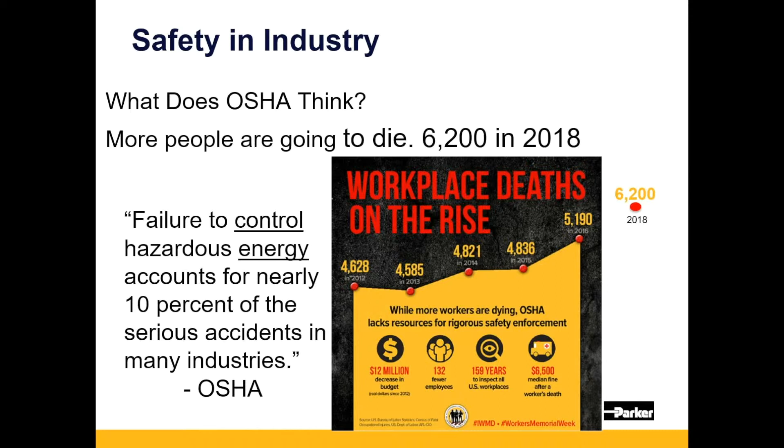OSHA cannot do this themselves. They have a huge budget decrease, and it would take them 159 years to inspect all of the plants in the U.S. So we need to work together to make industry better.

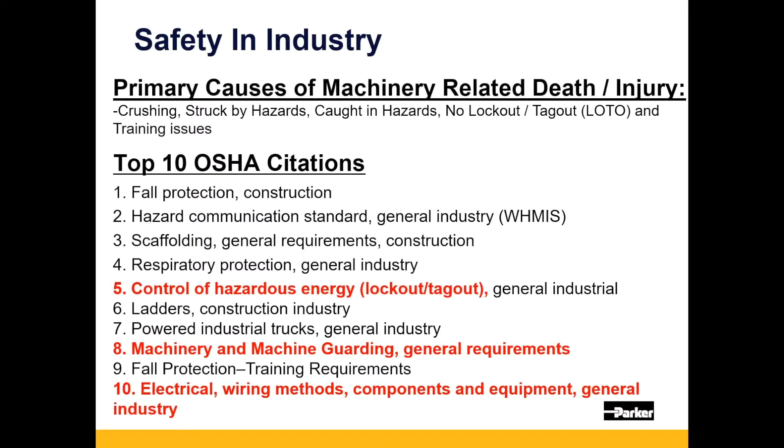What we do know is that OSHA writes a lot of citations because of machinery-related injury or death. And the ones I've highlighted in red are the ones where I feel we can really make a difference. Things like machine guarding, and really the isolation and energy in a machine has to be dealt with. To bring a machine to a safe state, we can't have trapped residual energy in a machine.

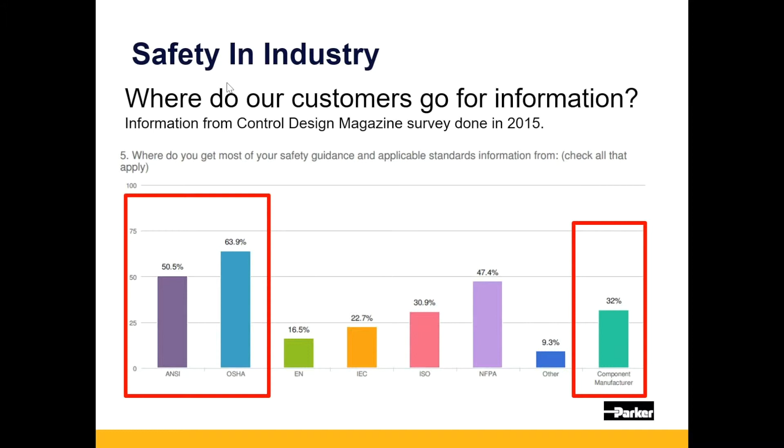So, where do our customers go for information? A U.S. magazine did a survey, this is back from 2015, and they realized that consumers and people are very confused about where to go. They're going to ANSI and OSHA and EN and IEC, and some of them even come to us, the component manufacturers, to Parker Hannifin for help, and companies like RG Group for support and assistance with systems.

So how does this all tie together? How does this work? ISO writes the standards. They were founded back in like 1947. They've been around for a long time. They're predominantly thought of as being European, but today ISO looks after 21,000 different standards, and they have 163 member countries worldwide. So ISO is probably the largest standards organization.

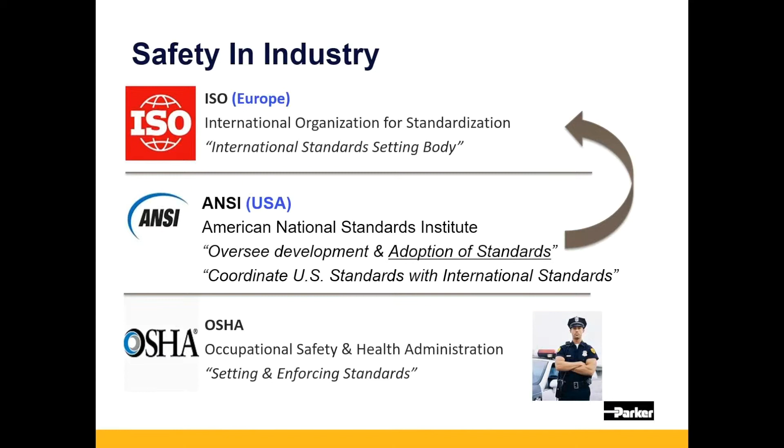Then we have ANSI, the American National Standards Institute, and ANSI oversees the development and adoption of standards, many of these standards coming from ISO, for the U.S. market. And then there's OSHA, the police who set and enforce the standards by adoption, applicable law. And for things they generally deem unsafe, they have something known as the General Duties Clause. So that's an interesting one, and we can talk about that a little bit more as we go.

So what does ISO say? The regulatory validation from ISO, and these regulations almost all in some way define isolation and energy dissipation as being necessary. So here is ISO 14118, section 3.3, and I won't read it all to you, but the gist of it is that it's an international standard about safety of machinery and prevention of unexpected startup, and it states in the gray text, dissipating any stored energy which may give rise to a hazard. It could be pressurized fluid, it could be pneumatics, energy stored in mechanical components.

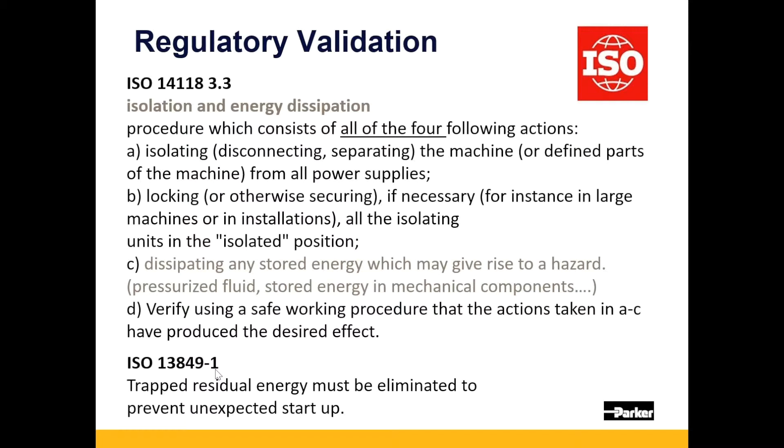And then ISO 13849-1 is another standard, and it very clearly states that trapped residual energy must be eliminated to prevent unexpected startup. And these two standards are predominantly in Europe. However, in the United States, ANSI has adopted these standards under what they call ISO 12100, and Section B11 states that it is applicable law and enforceable by OSHA that measures must be taken to prevent unexpected startup, including protective devices and energy dissipation.

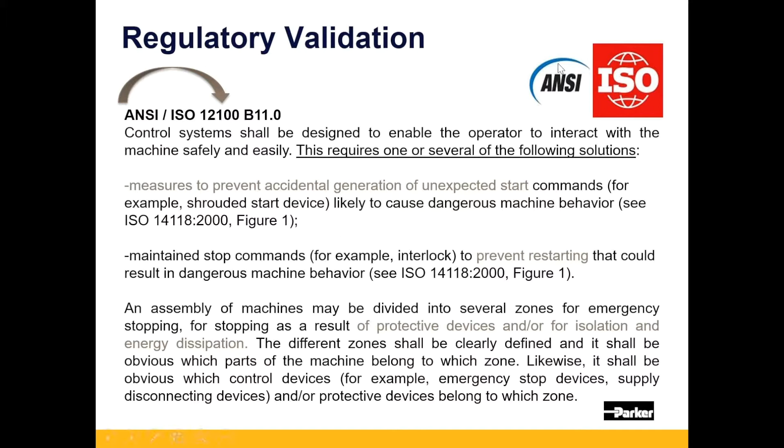So the long and short of this is you must dissipate energy in a machine unless it is unsafe to do so, in which case you must have a secondary means of stopping, blocking, or holding a load in place. So this is law in the U.S. under ANSI, who have adopted this ISO standard.

And then there's OSHA with the General Duties Clause. So basically how this works is OSHA can cite general duties and claim the workplace is unsafe and fine you. It's a very generic legal leverage that they have. If they come into a facility and feel that it is not compliant or safe, they have the right to make it correct, to write you a fine, and you have a number of days to remedy what they have found to be a deficiency.

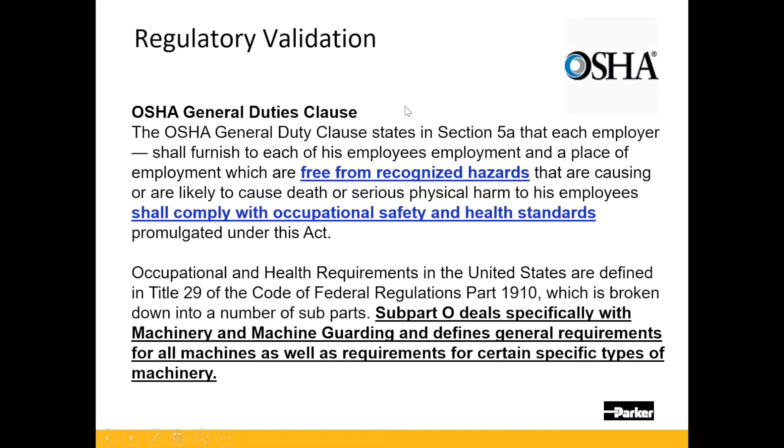So despite all the legislation and standards we have in place, that General Duties Clause can override, and it is at the discretion of the authority having jurisdiction, in other words, the OSHA inspector. So how all of this works is, these organizations work together, and some of my favorite comments in standards are, it is assumed that when present on a machine, a hazard will sooner or later lead to harm if no protective measure or measures have been implemented. And that is ANSI ISO 12100, which was adopted from the 13849 standard.

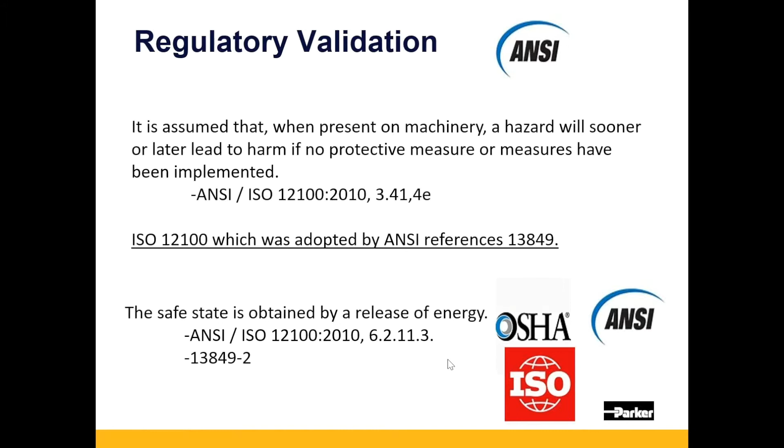And it's very clear that all of these standards basically point to a safe state is obtained on a machine by release of energy. So we want to work with industry, work with the markets, work with our customers, and help them achieve a safe state on machinery.

Now, the final section is how we can help. Some of the things we can do, and these aren't specific product things, but in general, there are products in the market to remove residual energy, and they're known as safety exhaust valves. I've kind of illustrated here how they work. A compressor provides pneumatic pressure through a filter regulator into a machine.

And the safety exhaust valve, let me see if I have a laser pointer down here. I do. Okay, so this unit here, the safety exhaust valve, is wired to a safety circuit. So if you had a light curtain, you could use some kind of safe relay and PLC, or if you wanted to achieve a higher rating, you could use a safety rated logic controller. And this particular safety exhaust valve, if there is a fault or an e-stop, will open and exhaust out the machine. So that's one way to eliminate trapped energy.

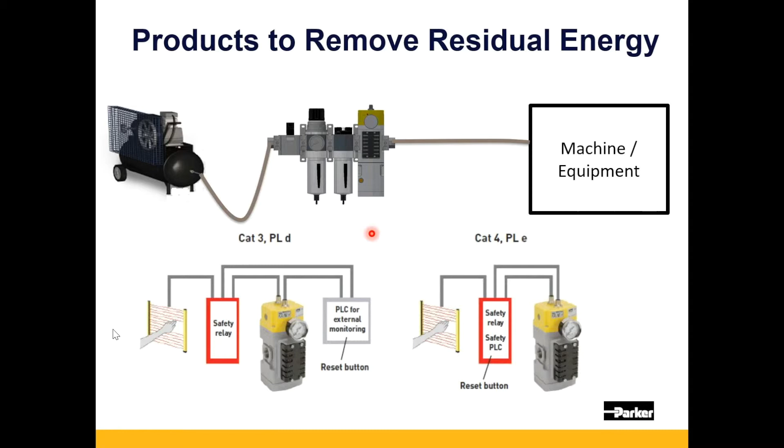Another way we can help with machine safety is we have the ability to provide safe power. And a lot of plants have migrated away from hard wiring and field bus, and they're now using industrial Ethernet networks. And there's a lot of features and benefits to going to industrial Ethernet. One of them is a certain type of product that allows you to run safe auxiliary power into it. And you can see here, laser pointer again, using a safe power supply to machinery directives, we are able to connect safe power in.

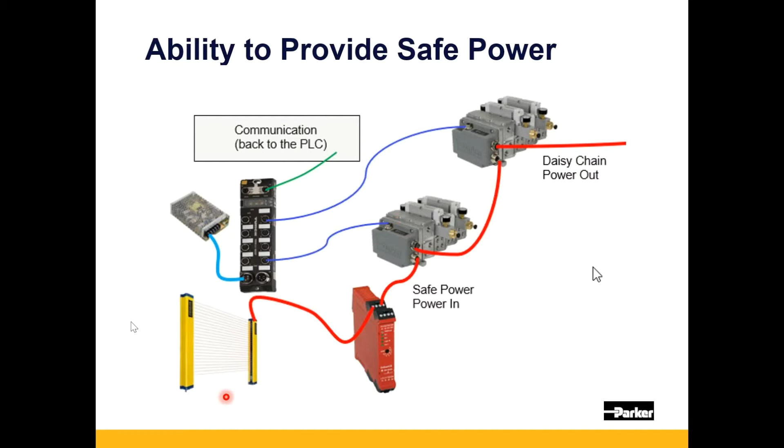This is a valve driver powering a valve manifold, and we can actually daisy chain that safe power out and continue safe power through the plant. And what this will do is if someone breaches the light curtain, you're going to kill that safe auxiliary power all the way through the plant, so you'll lose the power on the valve manifold, but you'll still have logic or communication back to the PLC with Ethernet. So there's another way to enhance safety on machine.

We have the ability today to zone a machine, and this is common in Europe, but not so common in the US. It's just starting to catch on. There is electrical zoning and pneumatic zoning. What I'm showing here today is pneumatic zoning. So we have taken a valve manifold, we have created pressure zone 1 and pressure zone 2. Let me get a laser pointer. So here's pressure zone 1 and pressure zone 2.

And what we have done, and I know this looks complicated, we've run Ethernet down from a PLC to a master. We're powering this valve with an IO-Link connection, and we have zoning here. We've also connected safe power to this manifold, so if we have a light curtain breach, we will kill safe power, and we can connect that power to zone 1 or zone 2.

This is handy if something is jammed in a machine and you need to go in and do some kind of maintenance. You have safety now. You have killed your pneumatic pressure, returned your valves to a home state, and you don't have supply pressure running through that manifold.

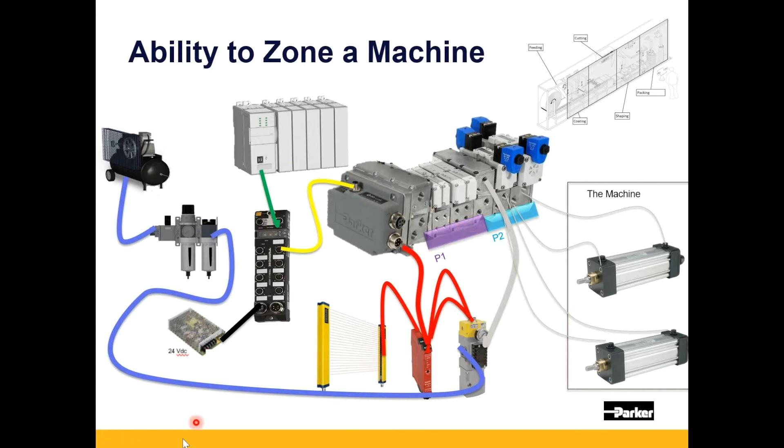Next, with industrial Ethernet, we have the ability to provide predictive data. And these are big industry buzzwords right now, but the long and short of it is by sending information back to the PLC, we can send information back that will help you better maintain your machine. So things like supply voltage warnings, short circuit protection, temperature warnings. We have thermal indicators in the products now that if there's an overcurrent or a heat problem, we will let you know before that machine goes down.

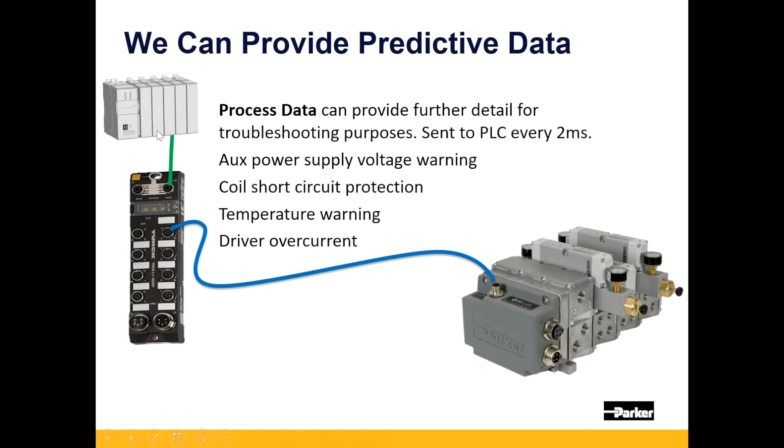And if you need more detail, you can go inside the product into the electronics, into the parameter data, and you can export out or look at more detail on what's going on with that particular section of the machine. So that predictive data can be gathered and utilized or used as needed, and it is very, very handy to eliminate and prevent downtime.

So on a machine, risk assessment should be conducted. And if you want to make a machine safer, you've got to identify the hazards. Risk assessments, step one, always design out the risk. But if you do a risk assessment and you cannot design out the risk, this is where we can come in and help you take technical measures to design out the risk, which means basically now you're into installing safety stuff and safety circuits. You want to find ways to protect from these hazards.

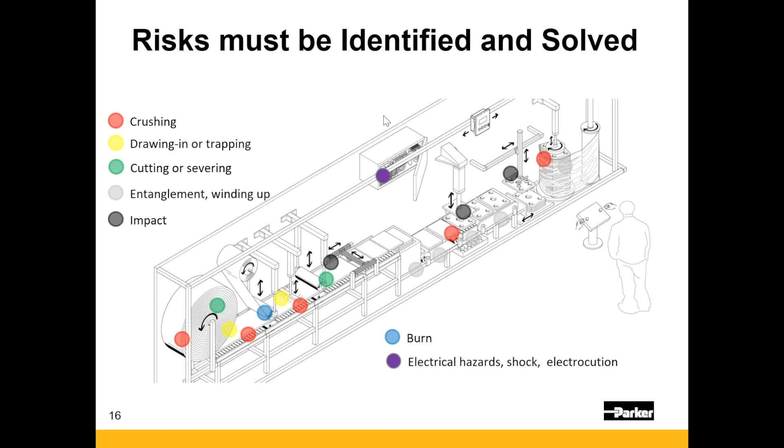It's not always feasible to go throw a guard up around a machine. Sometimes there isn't room. So you've got to get into interlocks and machine guards and light curtains, and always eliminating any trapped air. I see tons of machines every day in plants that store or hold pneumatic energy, and it's not for the purposes of holding a load in place. It's just simply old machine design.

So it doesn't matter what you do. If you're an OEM, original equipment manufacturer or machine builder, if you're MRO and you're doing maintenance and repair in the field, or systems integrator or general industrial facility person, you have options. So the first thing is you can always call in OSHA. They will come in and help you. They will determine where your areas of deficiency are, and they will work with you to remedy those areas, and they give you a period of time, and they will work alongside you to help you.

You can go out and have a risk assessment done. This risk assessment must be done by somebody other than the machine designer, so you can go to a third party and pay for that service, or you can use an engineer on staff, provided they have not built the machine. And of course, all of this should be documented.

These European standards require risk assessment. If you're shipping machinery into Europe, you absolutely must do a risk assessment. But in general, it is good practice to have this. It covers you from a liability perspective. If there is somebody injured on a machine, you've done due diligence, you've done a risk assessment, you've documented the components, you've used well-tried and trusted components, etc.